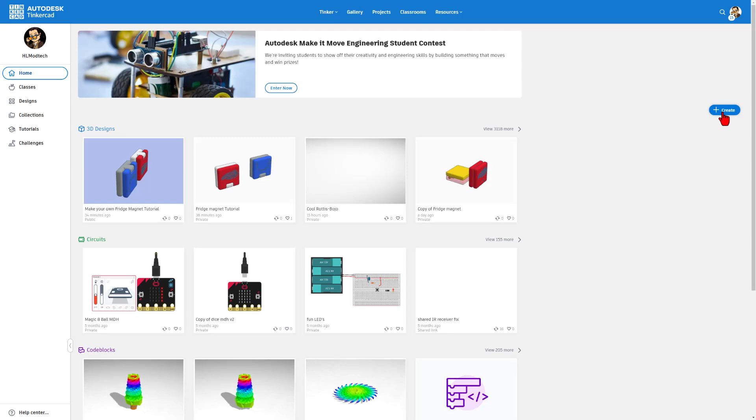Today though, we are going to work with a different lid. We're going to start, of course, by clicking home and choosing create brand new 3D design. I'm going to name it box with lid.

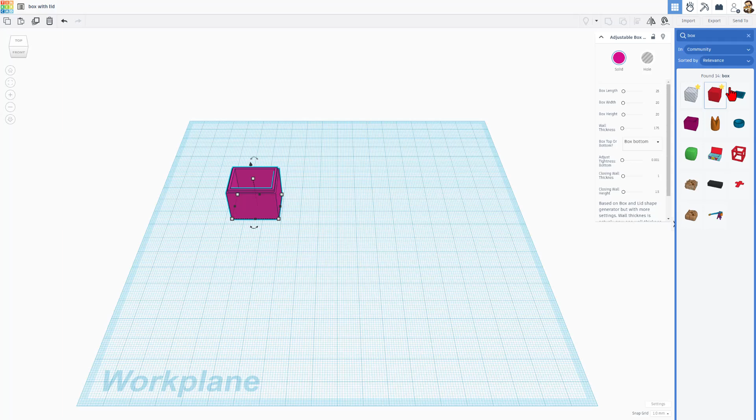So instead of box, we're going to type soft, and then it gives you the awesome soft box. Now, I recommend you making that a favorite. That way it's easy to find.

Once again, parameters, this one's parametric, so it scales really, really nice. And since we just made it a favorite, you can always find it quickly by moving to your favorites. Notice the more that you save, the more clicks it takes to actually find the softbox. It took me 5 clicks to actually find it all the way down here.

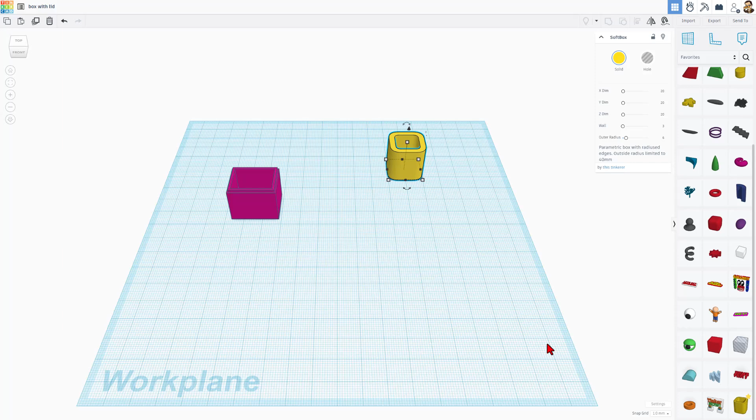I'm going to leave this softbox in here, and I'll also make notes. Remember, you can hit the letter N for note, and I'll put the links to those other two projects right here if you want to check them out.

Today, though, we are playing with the awesome adjustable box. We're going to make a printable box in just a couple minutes. I'm going to pretend that I'm making a ring box. I'm going to choose to make it 40 in this direction by 30 in this direction.

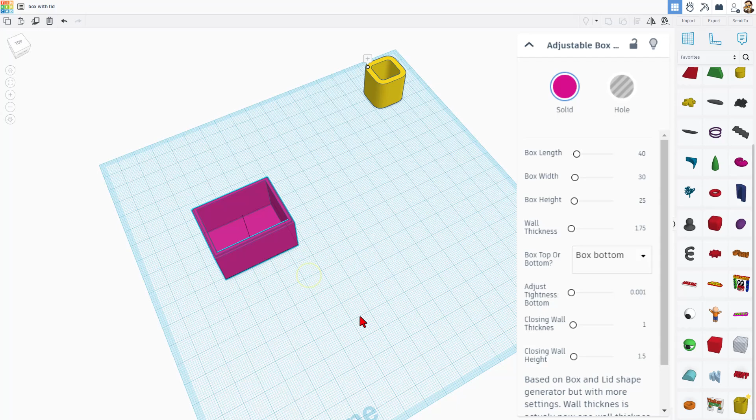Notice if it pops an error, you can just wait a second and retype it. I'm going to try 30 again. I'm going to set the height to 25 and press enter. And then after a moment, it snaps and we've got our awesome little ring box.

I'm going to do Control D to duplicate, move it over with the arrow keys, maybe shift nudge, grab it, whichever you pick. I'm going to pick a different color just for fun. Let's go with a yellow.

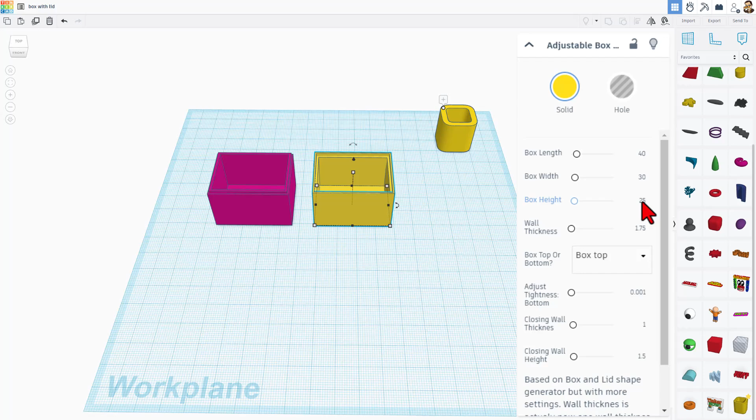And if we go back to the measurements, I want this to be the top. Notice it is going to slide over this, so I do not need all of that height. I'm going to make that height 5. Let's see how that looks. That is going to have enough room to cover the indent and snap in there.

Now I am going to show you something here. I'm going to do Control D, and I just want you to understand, if you ever stretch handles in one of these projects, you bust the parameters. If I go over here now and change the box width to 95, it's just going to be a wacky number because we broke the parameters. If you're doing a project using parameters, do not use the handles. Just a friendly reminder. I will wait for this to snap, and there it is with its new size. Watch this.

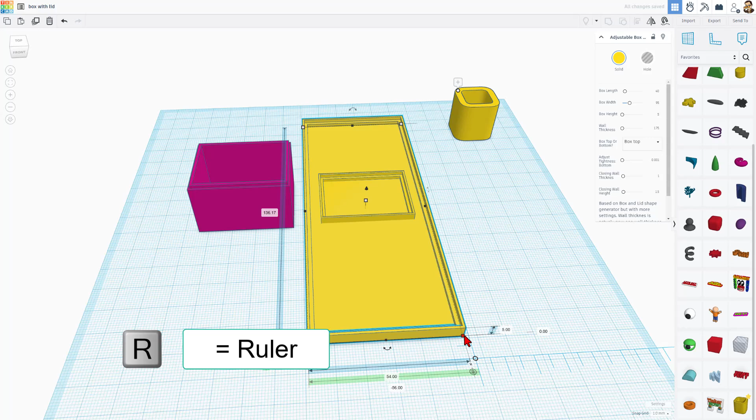If I bring out the ruler and set it down, I'll click on this shape, and by typing the number 0 here, it snaps to that corner. I already landed it on the first corner. If we check that distance, that's 136. That is not the 95.

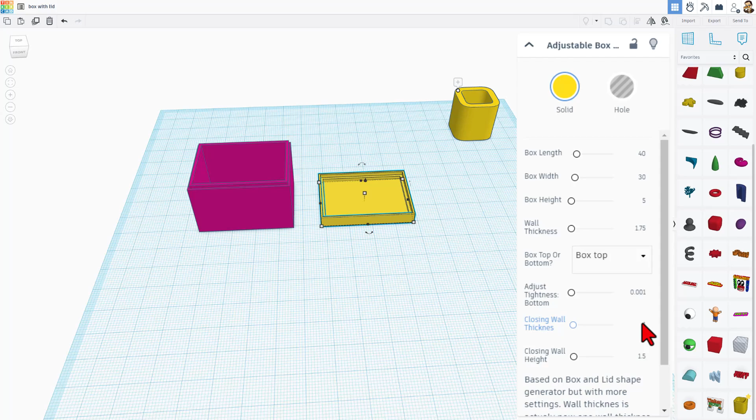So once again, do not adjust handles if you're playing with parameters. Now you may have to adjust the tightness based on your printer.

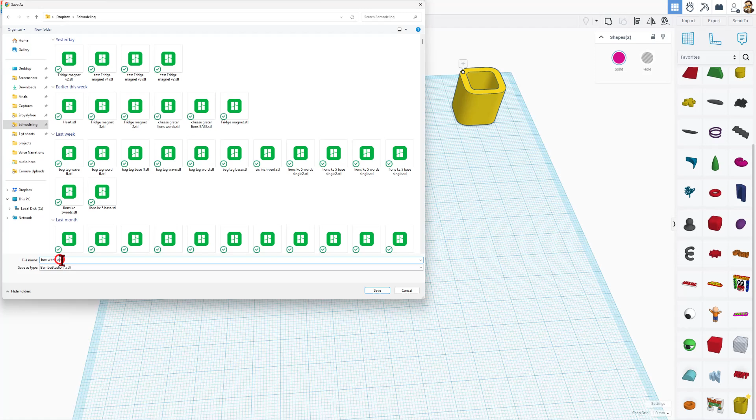I'm going to print this with my Bambu Lab printer just like it is, in a single color just to make this fast. Let's grab them both, choose export. Notice I do have the selected shapes. We're going to choose STL with the name box with lid, but I have done this before, so I'm going to real quickly put a V2 and save it.

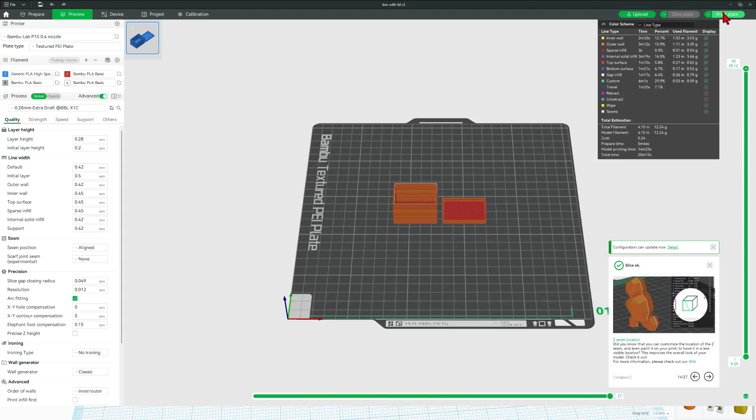Bouncing quickly to Bambu Studio, we're going to create a brand new project. We can add that box with lid. For today's project, I'm going to focus on speed with the extra draft. Let's simply slice the plate and print the plate. Looks like it's going to take 20 minutes, and let's send it to the 3D printer. Once it goes to the device menu, we do need to wait for it to download. Once it does, we can click play and monitor everything from afar.

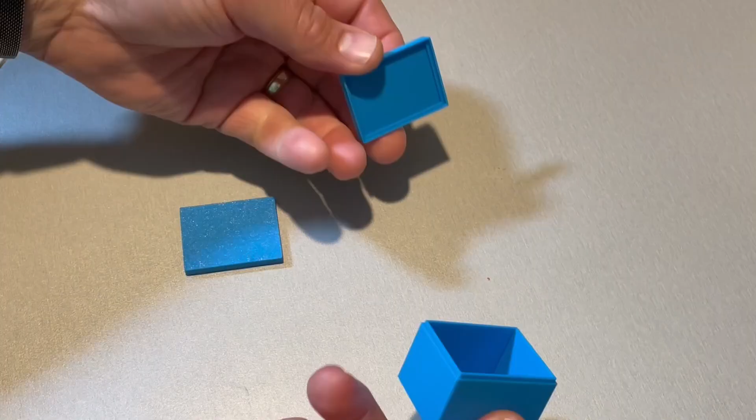All right, friends, so here's where it gets crazy. Fits, but falls off. We can adjust the tightness, I'll show you that setting in just a second, but it never gets as snug as I want for the Bambu Lab printer.

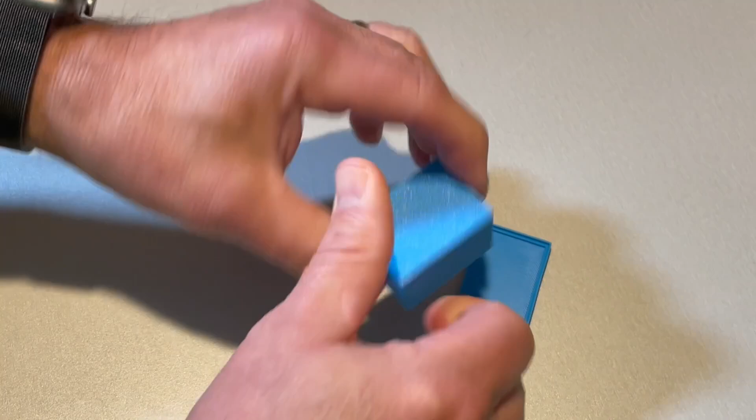So this is my modified version. Check it out. Snaps on nice and tight. Actually, got to get a thumbnail in to pop it off. But let me show you that setting so that you can create boxes instantly that latch.

All right, so the way that we're supposed to do this is to click here and adjust the tightness. You can jack that all the way up to 0.1, but on my Bambu Lab printer, it still wasn't snug enough. We could also make the height longer, so say we made this 3, so that way there was more material for it to latch.

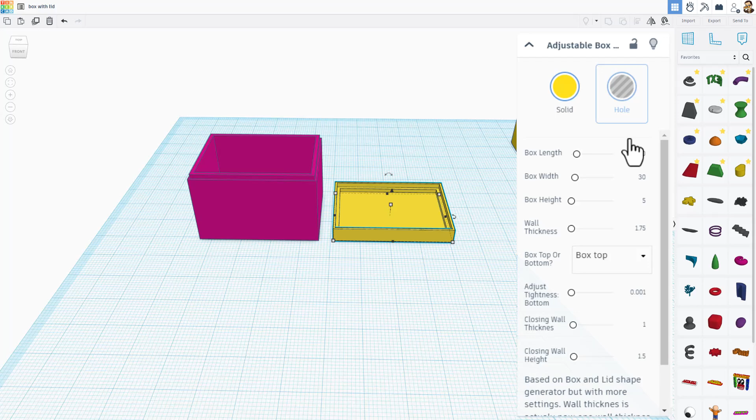On my test though, that really did not get the results I wanted, so I'm going to do Control Z and Control Z to go back to the original. Let me show you the solution I did come up with. I went over here to the lid. Notice this just changes the bottom, so that doesn't matter at all. What I did was I tried to make this 1.8, but if you type 1.8, notice it stays 1.75. So I just made it 2 and pressed enter, and boom, that is how we got the new lid that fits as snug as we want.

Friends, as I wrap up, I want to remind you, make sure you test this with a small box on your printer. Every printer has different characteristics. If yours is not as accurate as mine, you may be able to get away with just using that adjust bottom that's built into the system. Of course, with the P1S, I had to have the trick where I adjusted the thickness of the lid to get it to work the way I wanted.

I do want to send a shout out to Crankshaft007 for the question. Fun project, and I had not messed with this box in a long time.